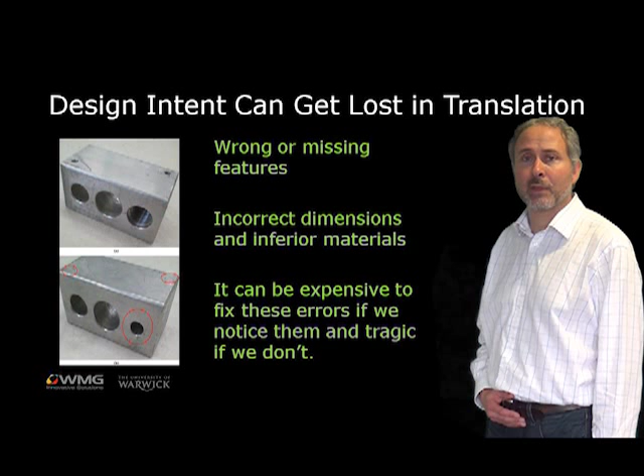Through history, design has typically been communicated through the use of drawings. These can range from simple sketches through to more complex engineering drawings. But essentially they are two-dimensional models of what in the real world is actually a three-dimensional item.

Therefore, the designer, or the person creating the drawing, has to choose a viewpoint, a particular view on which to present their information. And this is limited. There cannot be an infinite number of viewpoints, there just isn't the time or the paper available to do that. As a result, the design information is not always clear. And this can really lead to the mistakes we've talked about earlier.

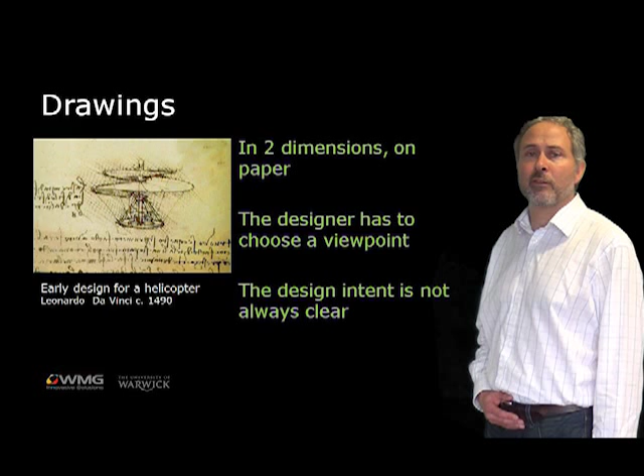Engineering drawings are a formal way of representing three-dimensional information on a two-dimensional surface, and they do this through the use of projections. Typically there are three projections on orthogonal planes, viewing the object from the side, from the front, and from the top or the bottom.

But as I've already said, there are a limited number of views that we can make. Whereas it may be possible to represent this information for simple products quite well, for complex products it's very difficult, and it can result in many views, large drawing packs, and expensive control procedures. Nevertheless, we can still have incomplete design data that leads to errors in manufacturing.

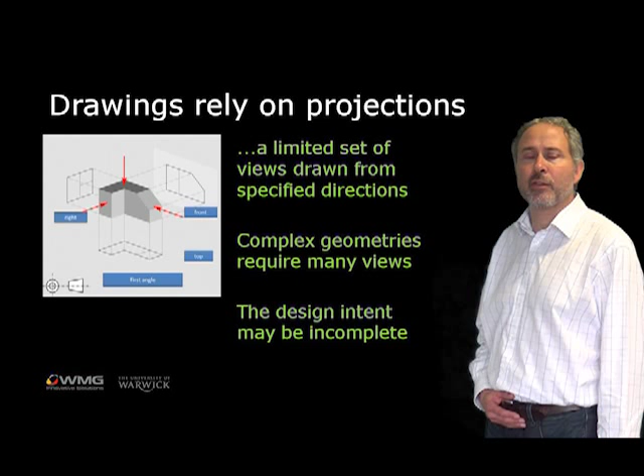Since the 1980s, much more use has been made of 3D models with the evolution of powerful computing technologies. A 3D model is more than a drawing. It is actually a representation of the 3D part, which can be viewed from the side, from the top, from the front, in fact from any angle. And this allows the manufacturer or the supplier to better understand the intention of the designer by viewing a close view, from far away, or even sometimes from inside the product, to understand the intention.

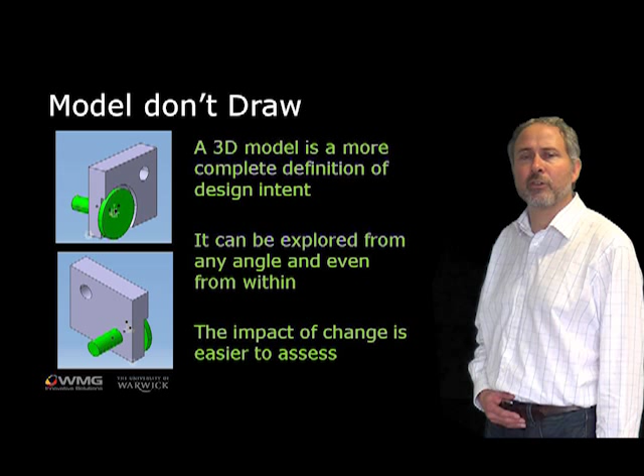It's also easier for us to assess the impact of changes. We can look at products in their environment, their packaging with other products, and their relationship in assemblies. And this reduces the cost of making changes and speeds up the process of new product development. So let's take a little while now to look at the creation of some simple 3D geometry.

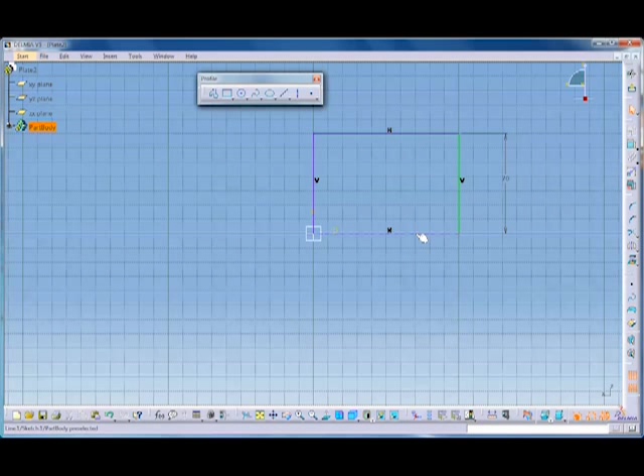So this is our CAD design. I'm going to start by sketching a rectangle on a plane. I'll do that quite simply by clicking the opposite corners of this particular object, and you'll notice some constraints appear. The next step is to dimension the sides of the box. I'll make that 70, and I'll make this one 80 millimeters in dimension.

By default I drew it as 100, so I'm just going to reduce that down to 80 millimeters. I type that in the box, and there you go, the size is reduced. Okay, the next thing is I'm going to put a little hole in the top right hand corner of this plate, and again I'm going to dimension it. This is design, not drawing, so I'm going to specify the size.

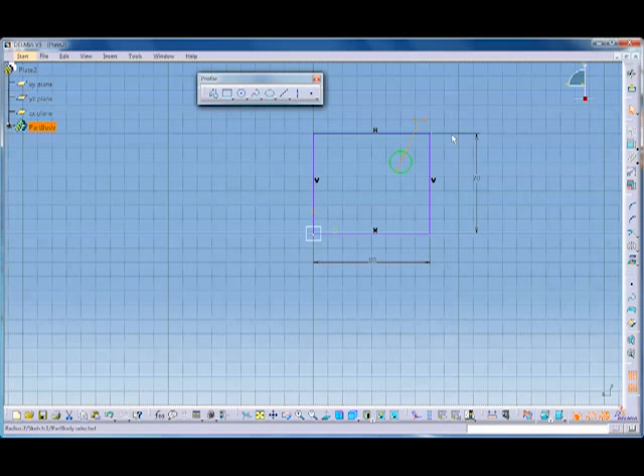I'll make that 15 millimeters outside diameter. I've done that now, and I'm going to flip it into 3D view to have a look at it and give it some thickness. I'm going to accept the default thickness, which is what we see here. It's 20mm thick plate, and we'll just have an inspect. There's our basic plate. So the next thing I want to do is put some more detail on it.

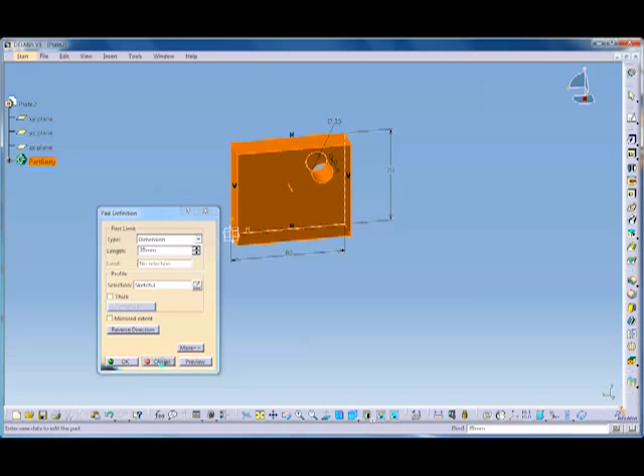So I'm going to select a surface. Whoops, not that. Let's try that again. Make sure I select the surface, go into the sketcher, and again I'm going to draw a circle which will become a hole. Now I know that when I'm going to create an assembly there's going to be a pin here, and I know the diameter of the pin is 15mm, so I'm just going to resize this hole to a diameter of 15mm, like so.

And the next thing is to set that hole in the right location. I've just drawn it there, but I want to use dimension constraints to offset it 20mm from the left hand border and 20mm from the bottom border. So I just apply a constraint from the centre of the hole to the edge of the plate, and I put that in as 20mm. There's my hole offset, and the next thing is let's make it a hole.

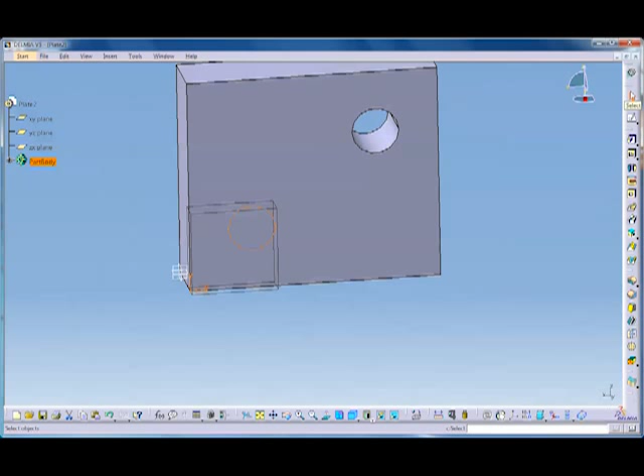To do that I'm going to go back into the 3D view and give it some depth. I'm going to put a hole constraint in here which is going to go through to the last surface, the far surface of the object, and you see it punch through there to the far surface. It's not dimensioned, it's specified up to the furthest surface, and the CAD tool knows where that is.

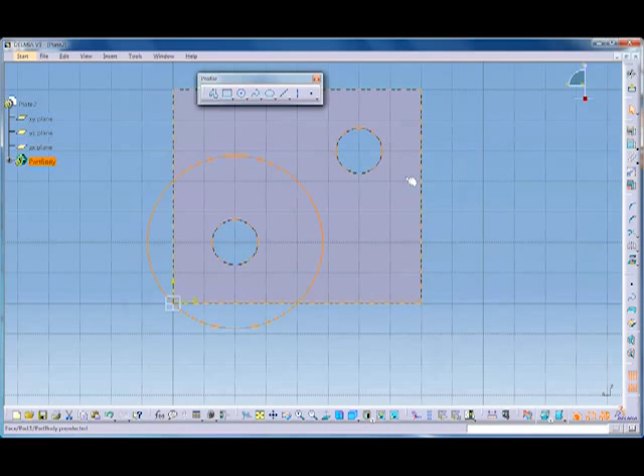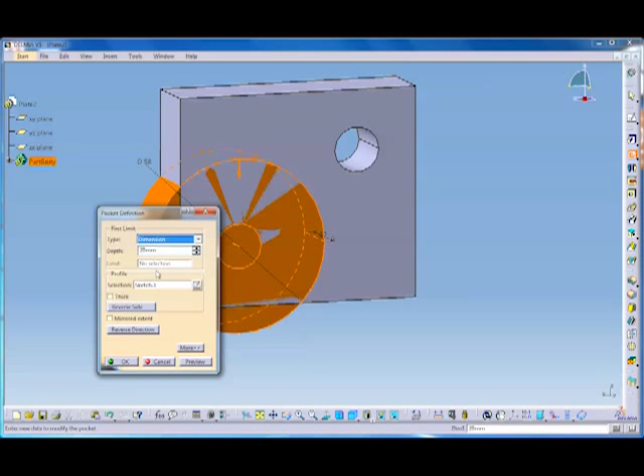Now this hole is actually going to sit in a slight pocket, and the pin will sit within that. So I'm now going to put in another circle, again, a bit of geometry here, and give that a dimension. I know the pin is about 50mm, so I'm going to make that 58mm diameter. And finally I'm going to go back into the 3D view and give it a depth of just 5mm, not up to last now, but a specified dimension of 5mm. So just type in 5mm in the depth field, and there's my plate completed, which I'll now save.

And this is a CAT part. So it's an individual component part. The next thing we're going to do is create an assembly, which is actually called a CAT product file in this particular tool. So I'm going into my assembly design tool, and for this particular assembly I'm going to insert two existing components. It's the plate 2 that I just created, and also a pin which I've drawn already.

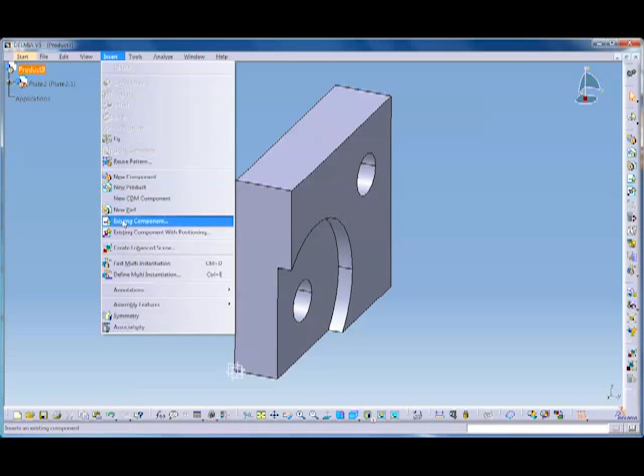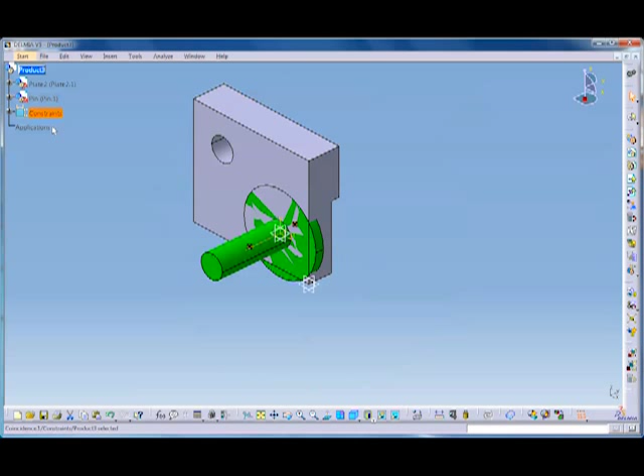So I'm going to insert another existing component, pick up the pin which is there, load it in, and you'll notice it will be coincident; the datums are in the same place. Now I could just drag this component around and locate it by eye, but in fact I'm going to use a coincident constraint to align the axes of these two hole features. And finally I'm going to set a contact constraint to place the surface of the pin against the part.

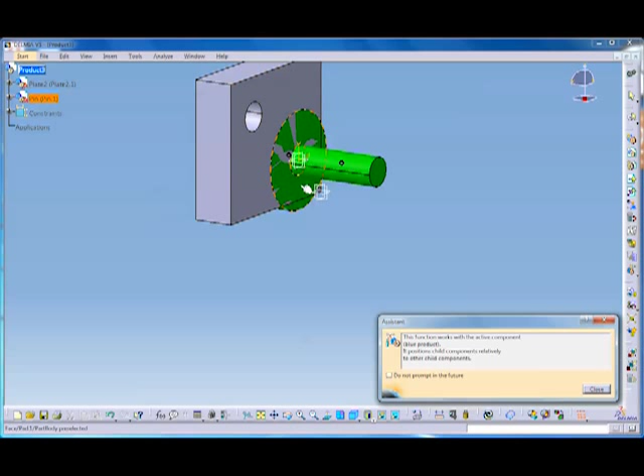Now that's the wrong side of the part, so I didn't do that right. So I'm going to go back and remove that constraint by undoing it and try again. This time I'm going to grab the bottom surface of the pin's head, and then spin around and choose the inside surface, and it snaps immediately into position.

And there's my assembly. As I said, it's not just items located next to each other, they are actually constrained to be in that, and that's the design intent. That's what the designer has decided, and here I'm just going to save that as plate assembly CAT product. That's an assembly product.

Few people on the shop floor actually have access to 3D graphic stations which would allow them to explore a 3D model. Most people on the shop floor still require access to drawings, and so we can now look at how we can convert a 3D model in CAD into a set of drawings, a process known as drafting. In fact, in traditional engineering, we don't have a 3D model. The design engineers start straight away with a drawing.

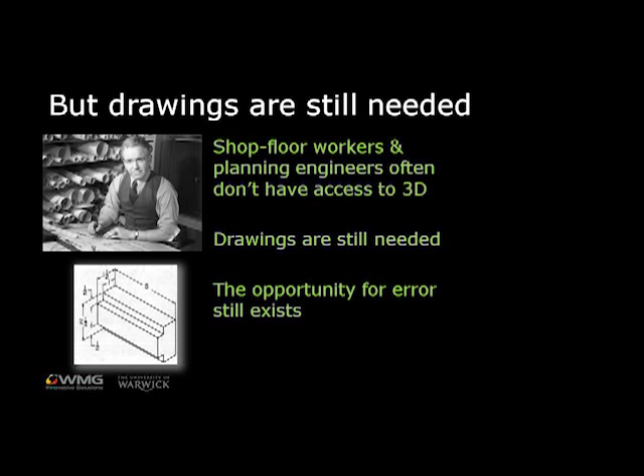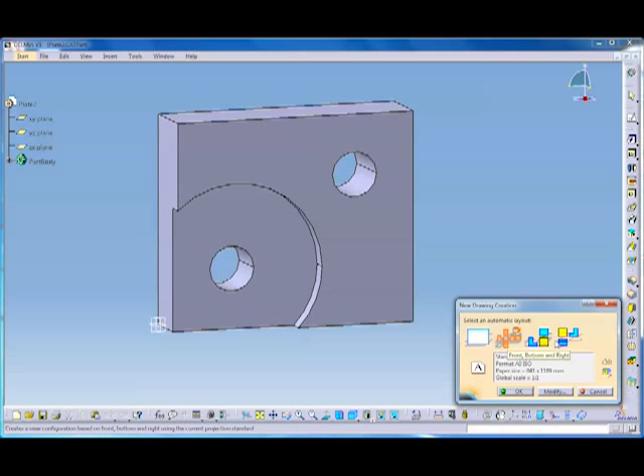So we're going to load our plate model, which we see here, and we're then going to use that to create a drawing. We're going to draw out some of the pertinent features and dimension them. So I'm going to switch to the drafting tool, and I'm going to select a layout. There are various types of layout, different standards that people can use, and you can show more or less information as you need. So here's some basic information. It's showing 3 elevations, a front view, a bottom view, and a right view onto the part.

And for each of these views I can select some features, an edge, a circle, a hole, and create some dimensions. Now these dimensions aren't essentially created by me. All I'm doing is I'm choosing to illustrate features of the design, and I can have as many or as few as I choose. I'm just going to set up some basic ones for the depth, width and height of the plate.

So I'm just going to select the final of those edges. I've got 80mm by 70 by 20. Those are the outside dimensions of the plate. And I'm now going to just pick up one of the hole features, that 15mm hole that we saw earlier, and I'm just going to grab that and illustrate it.

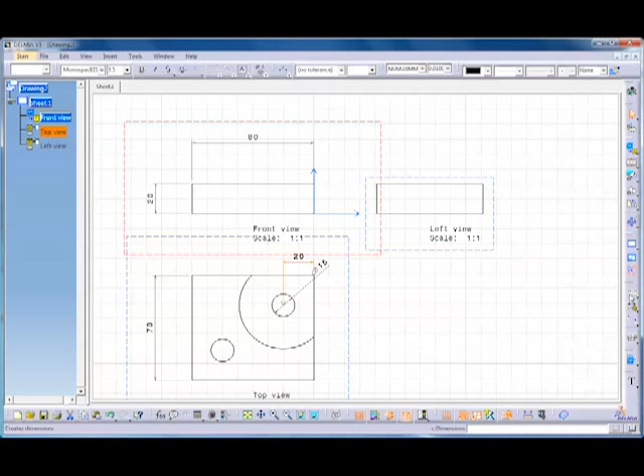I'm not designing here, I'm simply drawing. I'm exploiting data that's already in the CAD system and just presenting it. There's a certain amount I have to choose about where I'm going to position things to make it readable. I'm just going to put on the two key dimensions here of 20mm from both of those edges for the centre of the hole. So I'm just going to pick the right surface, that surface there, and draw that out to the side so it's readable. And I could do the others, but I'm not going to bother you with that.

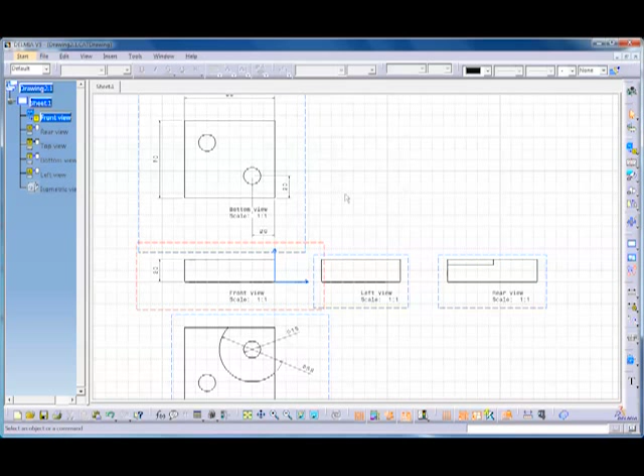I'm just going to load in another version of this with slightly more views, so you can see that there's a choice that anyone has as to how much information they want to show their clients or the engineers that are going to use this information. I've now got front views and rear views and bottom views.

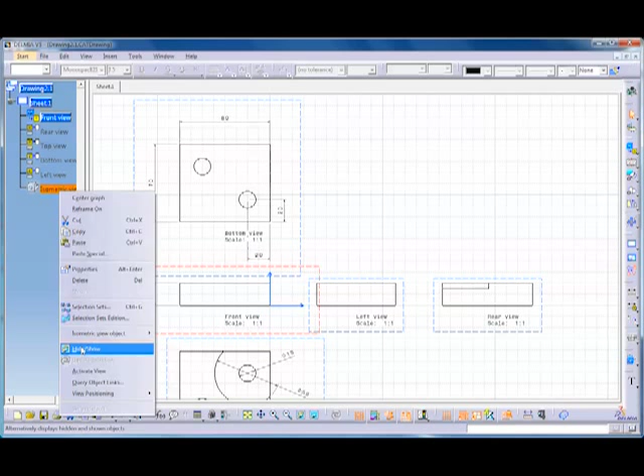But the feature I want to show you now is that we can exploit the information in the CAD system to show another type of data, which is called an isometric view, which some of you may have seen. And some of you may even know how to do this by hand. And the computer makes it very easy, and obviously in a complex design we might want to show many different isometric views of the component or of the assembly from different users' perspectives.

Although we may have a 3D model of a part and associated drawings to communicate this to shop floor and to supply chain, it isn't just about the geometry of a part. We also need to communicate information about materials, dimensions, surface finishes. We may even need to communicate information for health and safety reasons.

And of course, we'll typically also want to identify who the originator of a design is, when they created the design, and particularly importantly, what revision the design is at, given that most products evolve through time, and so drawings and 3D models in fact change as a result. So this information is typically not recorded on a 3D model, but is associated in a number of files or in a database, and we'll look at systems for managing this information in an integrated way in another session.

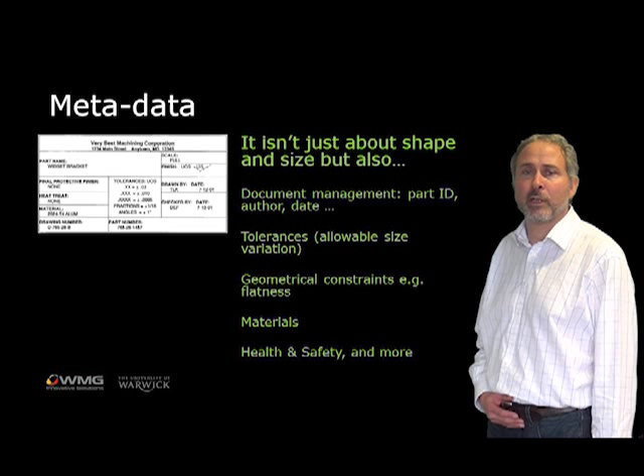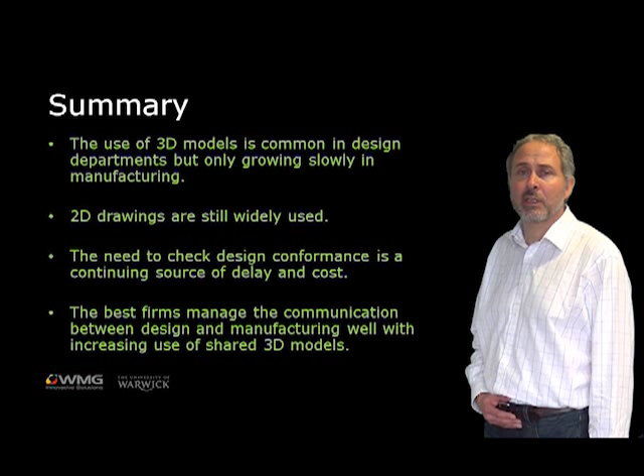In summary then, the use of 3D models is now widespread within design departments, even in small companies, but it is still growing only slowly in associated departments, for example in manufacturing departments. 2D drawings are still used, and as a result we will still need to check to confirm that what has been made meets the intention of the original designer. And this introduces additional delays and costs in processes like new product development.

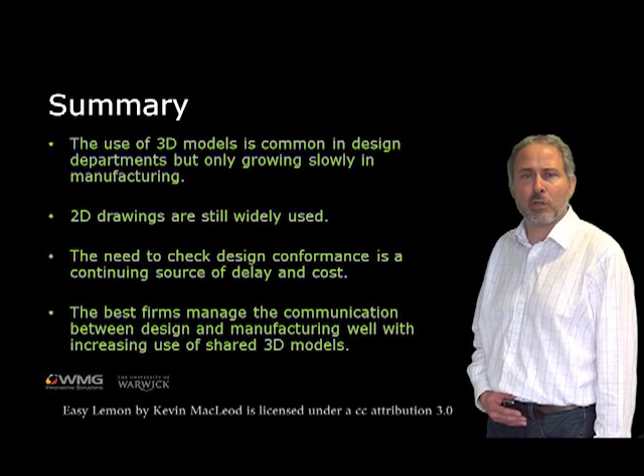What we do know is that the best firms achieve their competitive advantages through a combination of resources, and one of these is the use of shared 3D models. If we can introduce 3D models in other departments, particularly in manufacturing, then we reduce the chance of errors in interpreting design information and speed up the process of introducing new products and making changes to existing ones. And we'll look at these issues and the use of 3D models in other areas in other sessions.